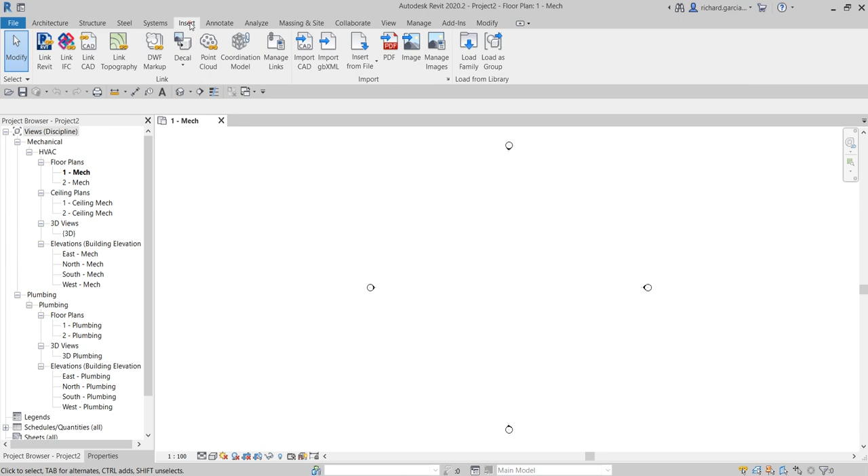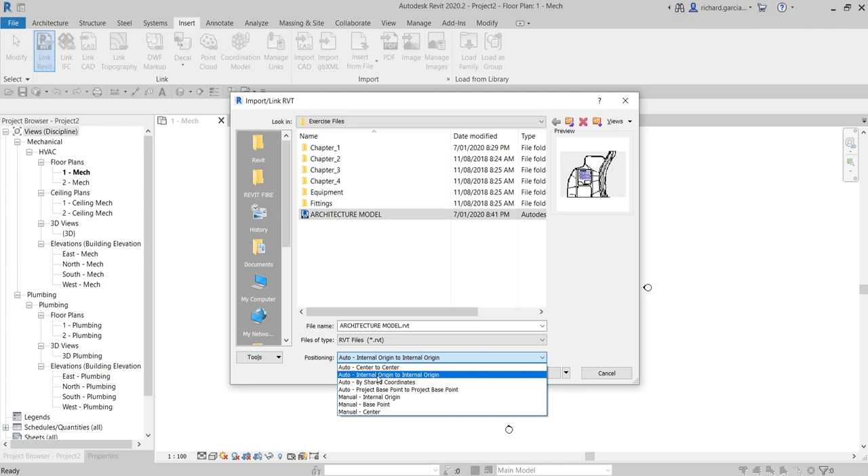I'm going to link that now. So I'm going to select Insert, and then select Link Revit. Just click that one, and let's say this is the architecture model, so I select this one. As you can see, this is the sample project that you can use in Revit. Every time you install your Revit software on your computer, you should have this model already. Alright, I'm going to select that, and use here Auto - Internal Origin to Internal Origin. I'll go ahead and select this one, and then select Open.

Okay, let me just drag this elevation here. So there's an elevation.

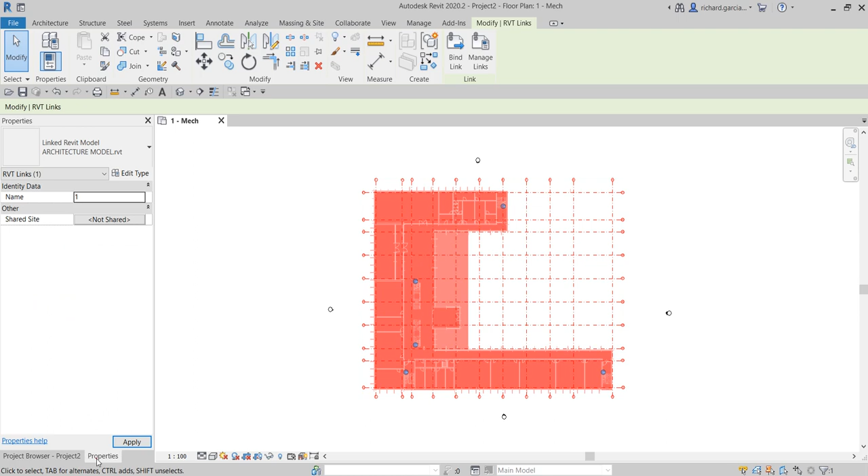Now the next thing that I'm going to do, after we link our architectural model, is select our architectural model. Then go to the Properties, and go to Edit Type to get into the type properties, and make sure the Room Bounding option is checked.

Make sure this one is checked, Room Bounding. You just check that one, and it enables the geometry to define the boundary of a room. The extents of a room are defined by the room bounding elements around the room, so that when you create a space or zone, Revit will detect the room of your linked model. So you'll be able to create your spaces and zones without any problem. This is the standard way - you always do this. You select the link model, go into the type properties, and check the room bounding, just in case you want to create a space or zone in your Revit project.

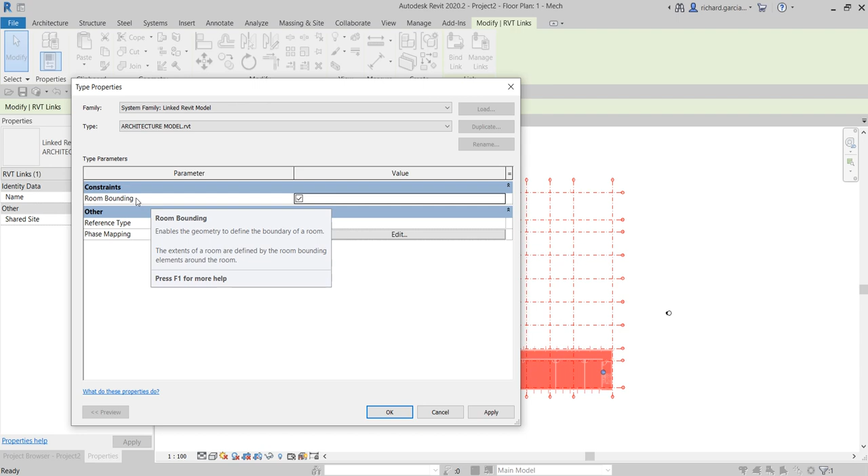Alright, so just check that one, and then select OK. There you go.

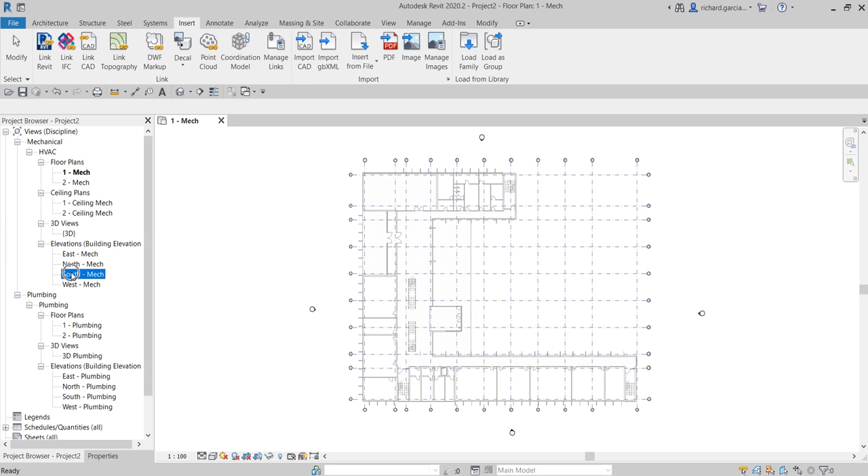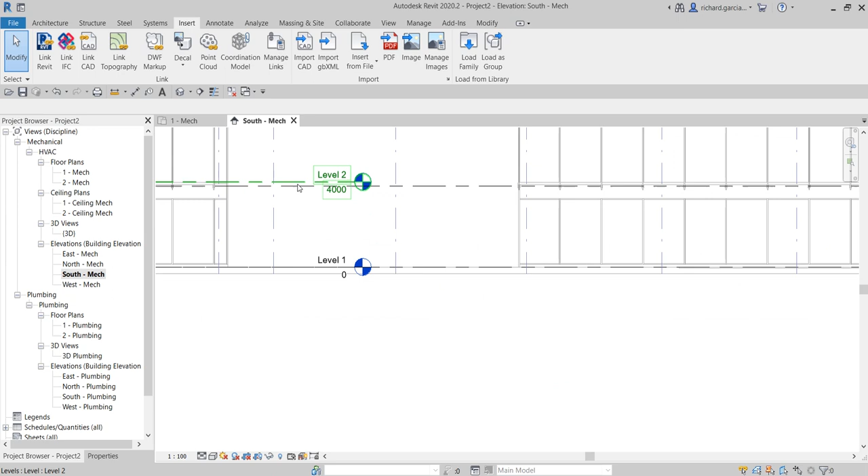Okay, now the next thing you need to do is check the levels of your architectural model. To do that, you just go to the project browser, and double click any elevation here. In my case, I double click South Mech. As you can see, by default I have here two levels - this template contains level 1 and level 2. As you can see, I can select the levels individually. I'm going to click the level, and you see there's a node there, and I'm going to drag that just to make my model tidy. I'm going to put it here, and this checkbox here denotes that your bubble is showing.

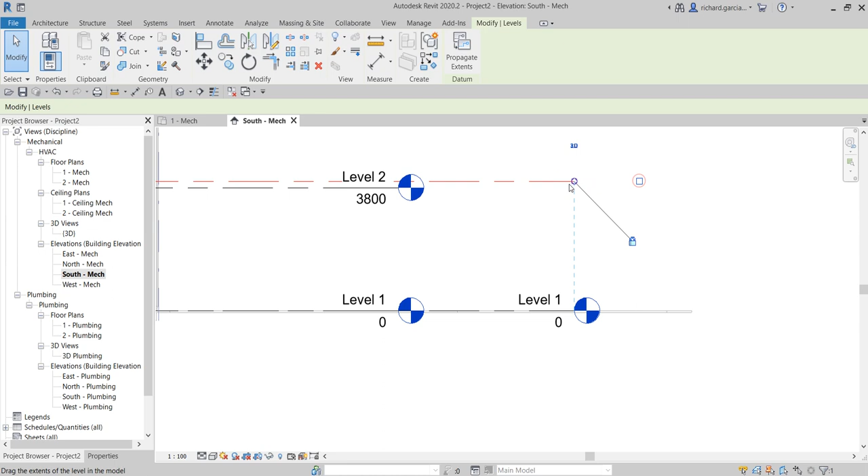If you check that, if this is unchecked, it will hide the bubble, right? You can also do that on the other side. There's also a box if you want to show the bubble there. But in my case, I'm not going to show that, so I just wanted to put it here.

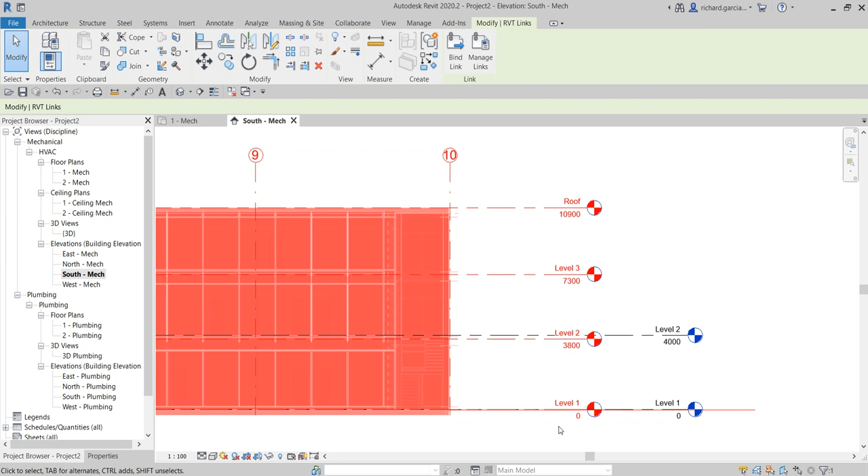As I noticed, the link model here, if I click it, contains 4 levels, right? In my case, my Revit project only has 2 levels. So what I want to do is have these 4 levels as well so that I can coordinate with the Archi model.

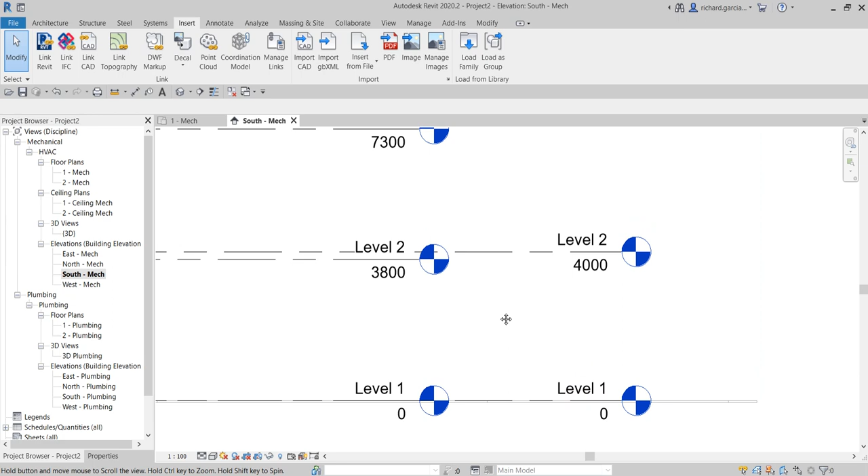Level 1 is already correct, so I have level 1 at 0 elevation. Now for level 2, I just need to follow the architectural model, so I just need to change this to 3800 also.

There you go. Now I need to create a level for level 3 and for the roof as well, for my sprinkler design. So for me to do that, I have several ways to do it.

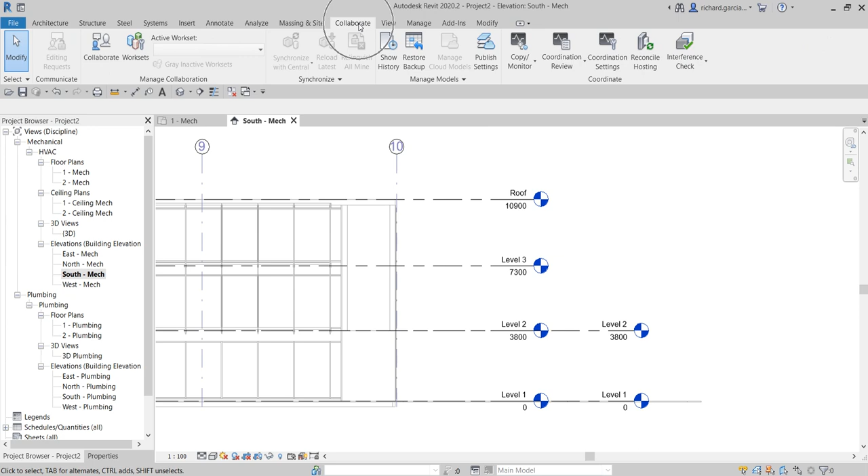I can go to architecture and create a level there, create a couple of levels, or I can simply copy the level here, copy one there, copy one there. Now the third option, which is what I'm going to do, is go to collaborate, and from the coordinate menu there's an option here: copy monitor.

What happens is it monitors and coordinates changes to elements that affect teams from different disciplines. So according to the definition, we use the copy monitor tool to monitor elements between the host project and a link model, or within one project. When one team moves or changes a monitored element—say, our level—other teams are notified so they can adapt their designs or work with team members to resolve the issue. That's how the copy monitor helps in coordination.

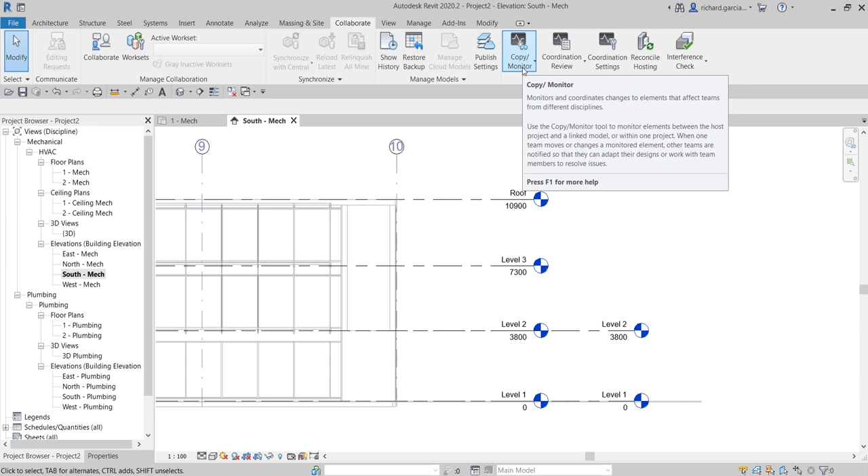Let me monitor this one. Let me show you how to monitor level 1, so that just in case the architectural team moves their level 2, for example, once I reload this link model in my project, I will be notified that there's a movement on level 2. That's how it works when you monitor your level.

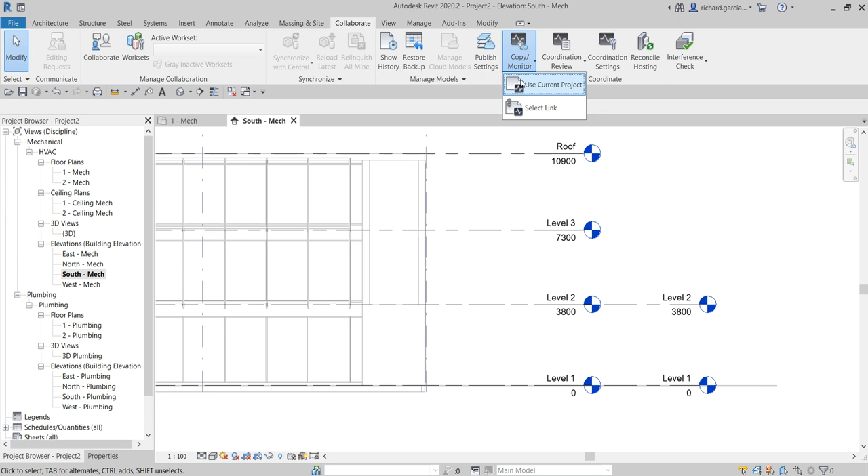All right, so let's copy monitor. I'm going to click that. You select this option, select link, just click that one, and then let's click the link model. Then you will see that you're now on the copy monitor here.

Now I'm going to select the monitor tool. Just click that, and then pick an element to monitor. So I'm going to monitor my level 1, and then the level 1 link, which is this one. Once I click that, you will see this symbol here—that symbol means my level 1s here are being monitored.

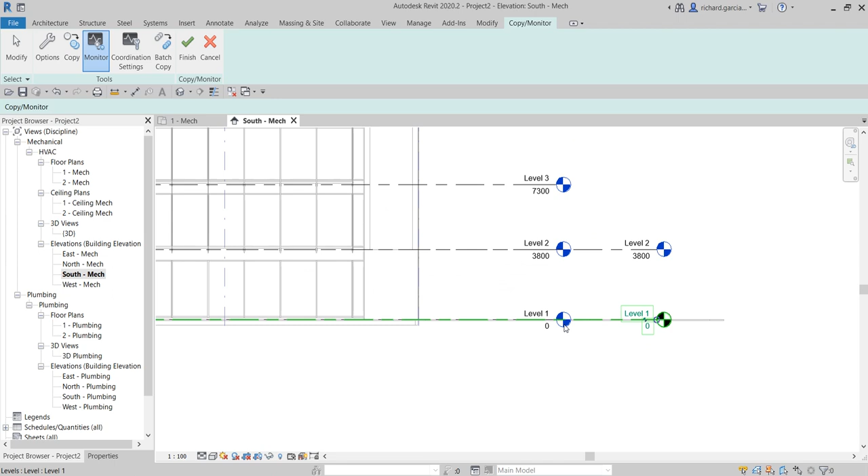That's what I'm going to do also on my level 2 and then my level 2 link model. I click that, click, and again you see that icon, meaning my level 2 is now being monitored. All right, I'm now going to finish this. And there you have it—my level 1 and level 2 are now being monitored.

So just in case there's a change in the architectural model—for example, they changed the height of their level 2, made it, let's say, 4,000—once I reload the latest architectural model, I'll be notified that there's a change on the level. There's a warning that will appear here on the coordination review.

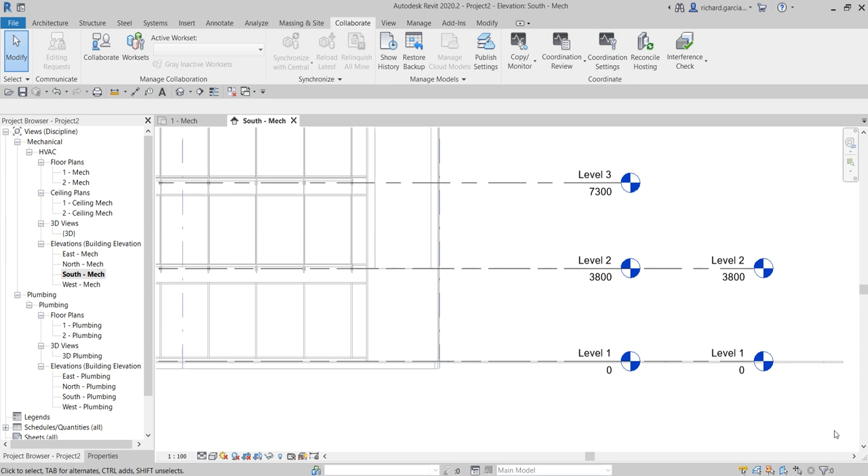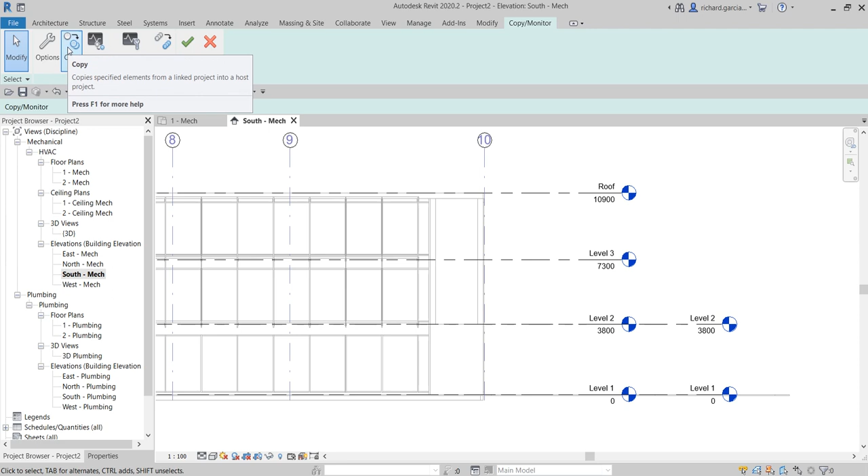Now for level 3 and for the roof, what I'm going to do is select again the copy monitor, select link, select the link model. This time around I'm going to copy the level 3 and the roof, so I'm going to select copy.

Since I have multiple levels to select, instead of doing it one by one, I'm going to check the multiple option here, and then I can use crossing selection like that to select both, and then select finish here.

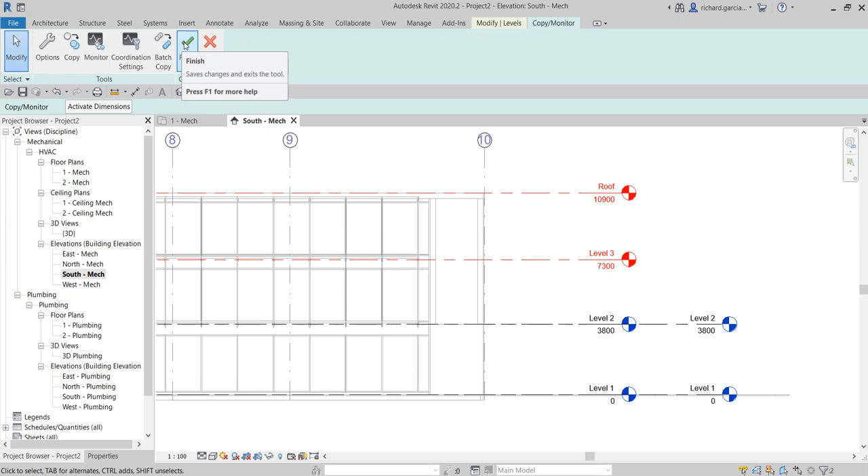Select the finish here first. Do not select the finish here. Select this finish first so that you don't mess up. So once you finish that, you go to the copy monitor again, and then that's the time you can now select finish.

So if I'm going to select level 3, I can now click this, and then I can now drag this. That is now for my MEP project or my sprinkler design project. There you go. So I now have the levels on my link, and also I now have the levels on my project.

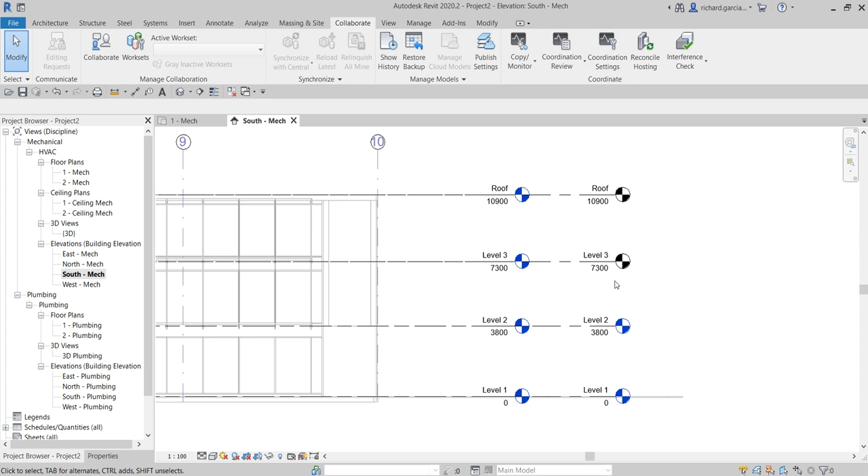Copied and monitor. Now notice that my level 3 here and then the roof is colored black. The reason why it's colored black, not colored blue, is because I don't have the floor plan for my level 3 and then for my roof here. That's the reason why it's black. Because what we just did is we just copied the physical level here for level 3 and then for the roof, but we didn't actually create the floor plan for level 3 and then for the roof. That is why the color is black.

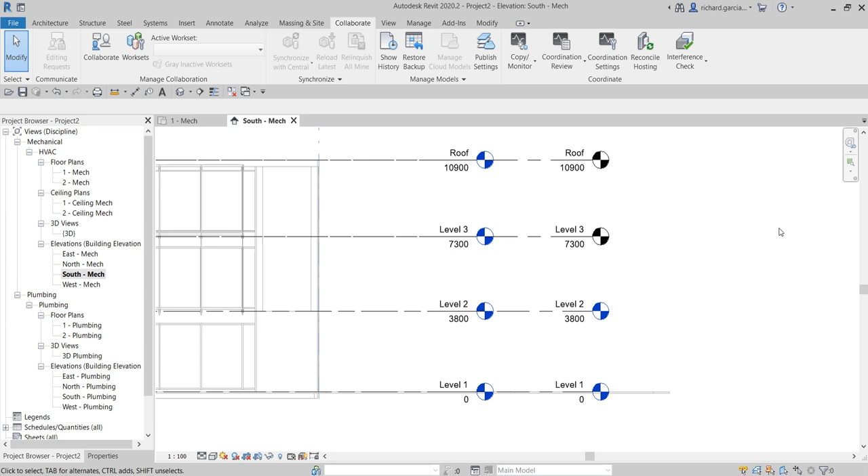Now, for us to address this issue, we are going to create a floor plan for level 3 and then for the roof. To do that, since it has something to do with view, you need to go to the view tab, and then there's plan views here from the create panel. So you can click the drop down arrow, and then you just need to select the floor plan.

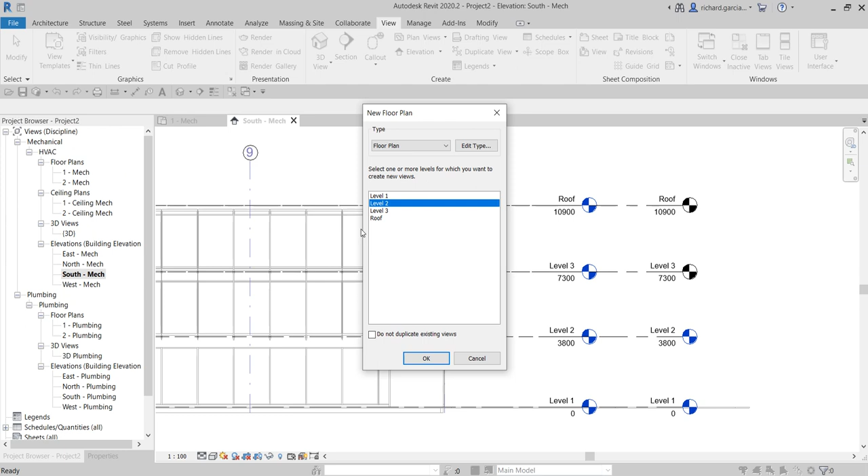Just click that. And then you now see here the two levels, the two plans that you don't have here on the project browser. You also have an option here if you want to duplicate the existing view or if you do not want to duplicate the existing view. If I'm going to uncheck this, meaning I can duplicate the existing view that is level 1 and level 2. But since I already have that floor plan, I am not going to duplicate the existing view. I just want to show here the levels that I do not have on my project browser, or the plan views that I don't have yet in my project browser.

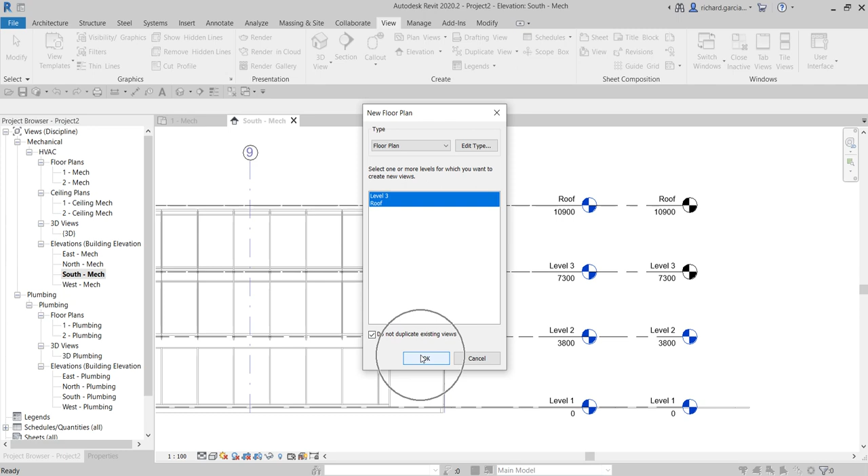So I'm going to select both. I'm going to hold control to select the roof, and then I select here OK. There you go. So I now have here level 3 and then the roof.

Now I'm going to change this. So instead of 1-Mech, I'm going to rename this. I click, right click and rename. So I'll just call this 1-Sprinkler, or fire protection, or FP, or whatever name that you want or whatever standard that you have in your company in naming your sprinkler view. Let's say I'll just call it 1-Sprinkler.

Same with my Mech here. To rename, you can either click, right click and rename, or just double click and then click again, then click again, and you'll be able to rename that. So this is sprinkler. Oops.

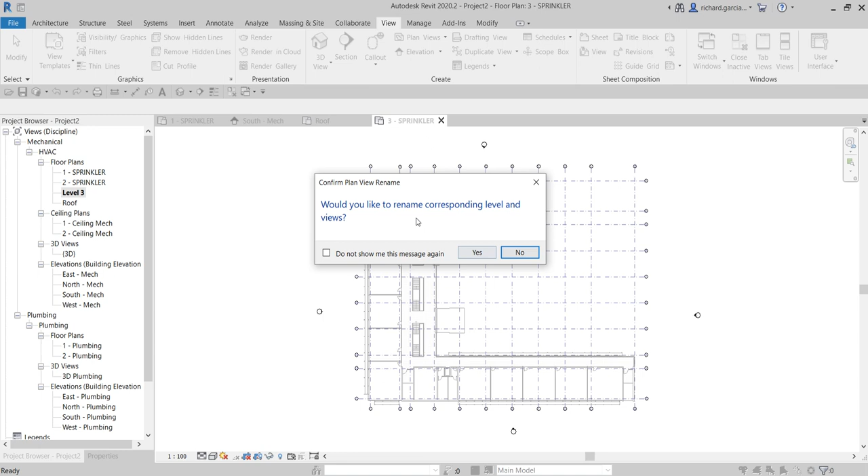Would you like to rename corresponding level and views? I'm going to not show this message, so I'm not going to change it. I'll just select no to just click. Okay, sprinkler. There you go.

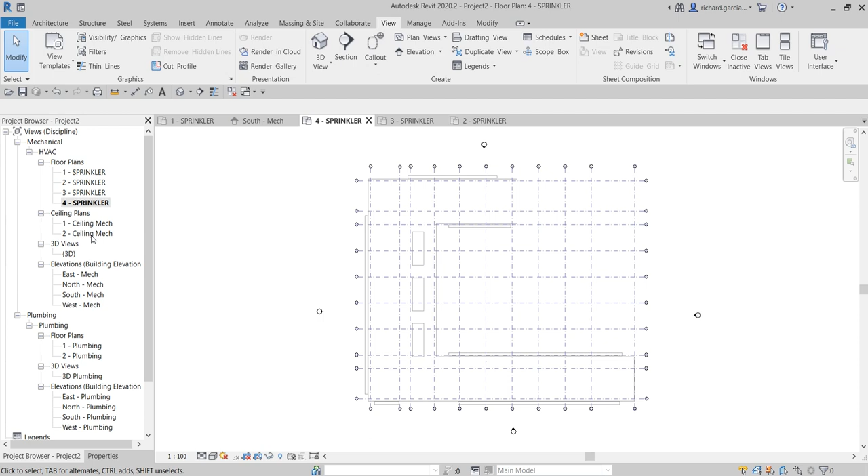So I have now level 1 sprinkler, level 3, level 4. Now I also want to create my coordination view, the ceiling plan view for my third floor. I'm not going to create a ceiling plan for the roof. I just want to create ceiling plan up to third level, not on the roof.

To create the ceiling plan view, the third one, by the way, let me just quickly rename this one. So this is the ceiling for my sprinkler, the ceiling for my sprinkler.

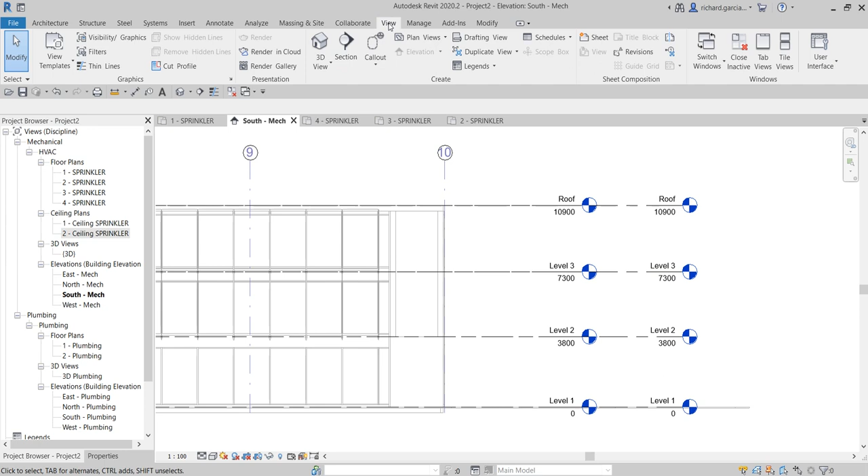Alright, so to create the ceiling plan for the third level, just need to go to the view, plan views, reflected ceiling plan. Just click that. So I'll just select level 3 there, and then I just select here OK. There you go. So it's now inserted here on my coordination. If I'm going to dig into this one, I click that, there's a question mark there, so there's the ceiling plan.

There you go, so this is what I'm looking for. I can also click the view once and then press F2 to rename it. So to rename, just click the view and then press F2. So this is for my ceiling sprinkler.

Now, what I want to do here is I do not want to place all my floor plans, the sprinkler plan and the ceiling sprinkler, under the HVAC discipline because I'm doing a sprinkler design. So I do not want the sub-discipline to be HVAC. That's why I'm going to click all of these views by holding shift, click level 1, hold shift, then click number 4, the sprinkler, and then go to properties to change the sub-discipline.

Oh, it doesn't allow me to change it multiple times, so I guess I just need to change it one by one. So I click this, go to the properties, and change the sub-discipline. Instead of HVAC, I will just type sprinkler. Okay, and enter. There you go. So as you can see, it's now here on my sprinkler sub-discipline.

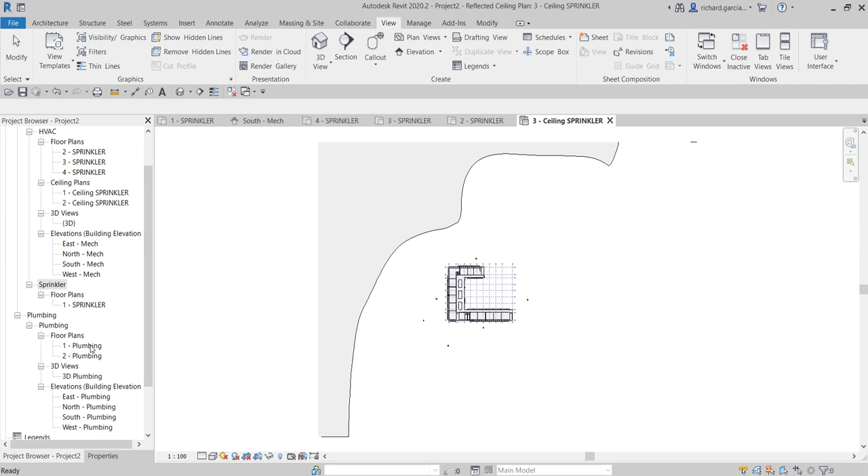Or let's say, for example, I do not want sprinkler, I want fire protection instead. Okay, and then enter. There you go. So I click this, go to properties, and instead of sprinklers, I look for fire protection. Apply. And there you go, so I now have fire protection as the sub-discipline.

So for these views, hopefully I can change it multiple at once. It doesn't allow me, okay, so I'll just change it one by one. I click, put it in the properties here, and change the sub-discipline, and then look for fire protection. There you go.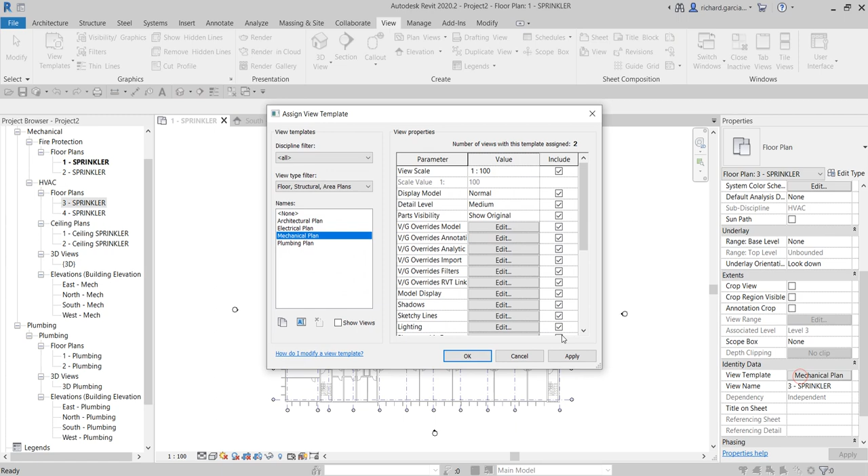Now for this one, if I click this, notice that I can't change the sub-discipline. Why? Because currently, if I move the slider down, there is a view template applied here on my 3 sprinkler view. The view template applied is mechanical plan. So what I want to do is remove the mechanical plan view template first. I click that and select none. This is probably the reason why it is not allowing me to change the sub-discipline in multiple selection, so I remove it and select none. There you go, later on I'm going to show you how to use the view template.

Now I'm going to select level 3 and then hold control to select level 4. Hopefully I can now change it. Yes, so I can now change it. I select fire protection and there you go.

Okay, same here with my ceiling sprinkler. So I have sprinklers here. I click this, click level 2, and then change the sub-discipline. Instead of HVAC, I'll make it fire protection. There you go, same with this one.

Alright, so I click that, the sub-discipline is already fire protection. Now the discipline here is coordination, so I want to put that under mechanical. I select this view and this time change the discipline instead of sub-discipline. I click the dropdown and look for mechanical, and there you go. So I now have set up my level 1 to 4 floor plans and my ceiling plans, my coordination views 1, 2, 3, under the mechanical discipline and the fire protection sub-discipline.

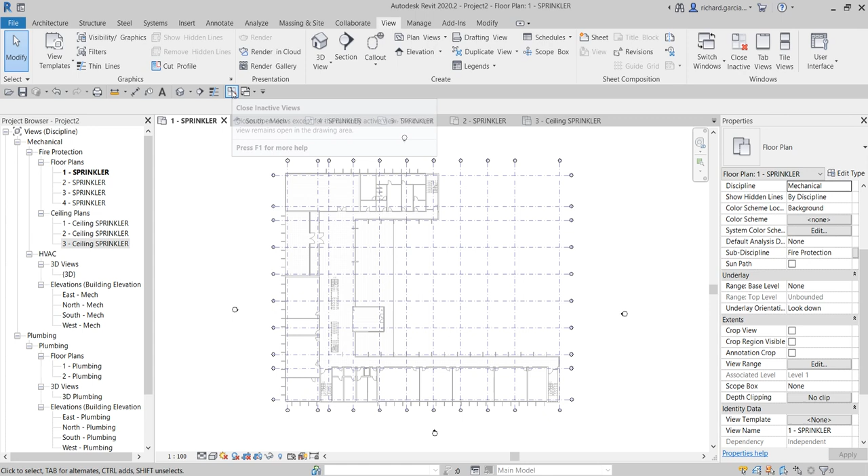Now what I'm going to do is copy first the grids here. I want to copy the grids because currently these grids are from the link model. So for me to be able to copy the grids, I can just use copy monitor for this one. To do that, let's go to Collaborate, Copy Monitor, Select Link. Let's select the link model and then let's copy monitor.

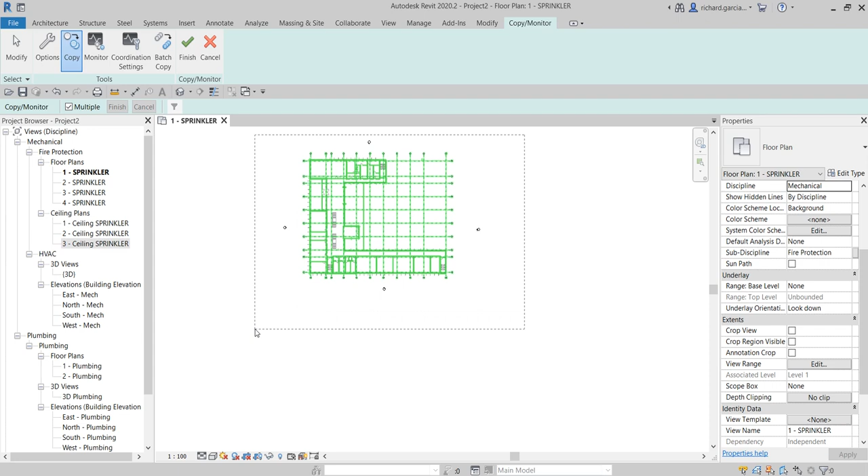Copy and then make sure you check the multiple, since we have multiple elements that we'll be selecting. I'll be doing it like this. And then we are going to filter this. Where's the filter? There's the filter selection. I just want to select the grids, so I'm going to uncheck the rest, and select here, OK.

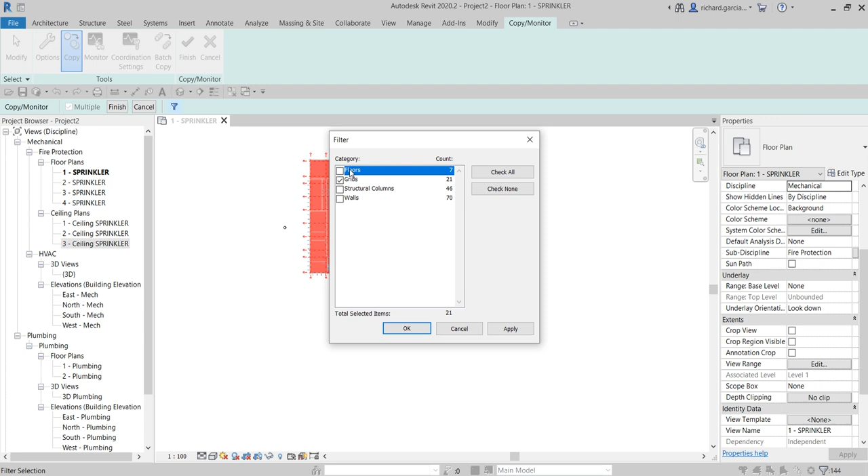It will also tell you what are the elements that you can copy monitor. So does that mean you can copy monitor the walls, structural columns, and the floors? I think so, yeah, but we only need to copy the grids. So I select the grids and then select OK. There you go, so only the grids are selected.

So I'm now going to finish it, and then go to the copy monitor and finish it.

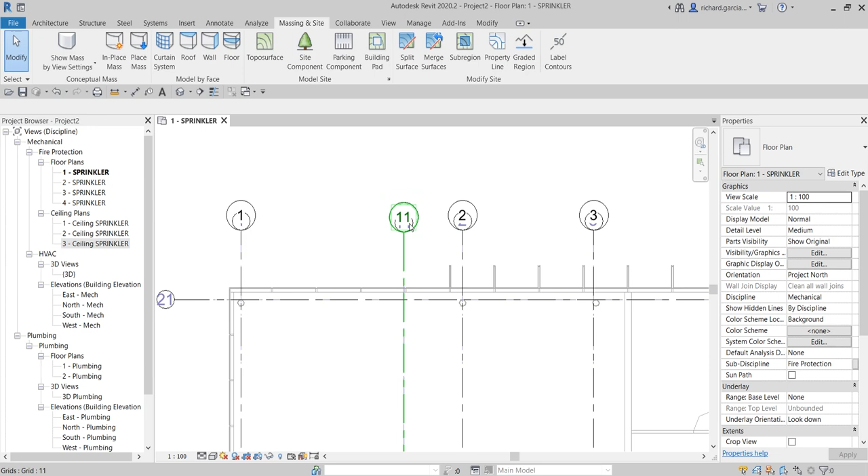So I now have here the grids of my Revit MEP project for my sprinkler design. That's why what I'm going to do is type VV, the visibility graphic overrides, VV, Victor Victor, or I can just click edit here.

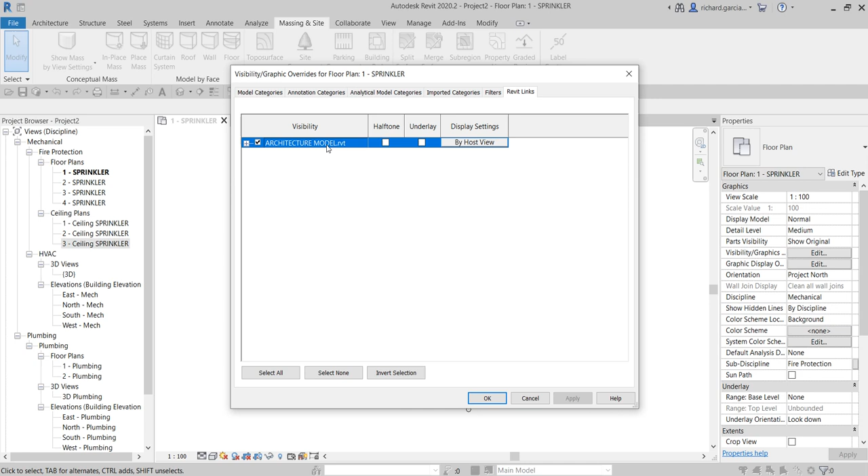And then I go to the Revit links. This is the link model. So let's go to the by host view and then customize it. The reason why I want to customize that is I want to manually turn off the grids of my link model. So I need to make it custom.

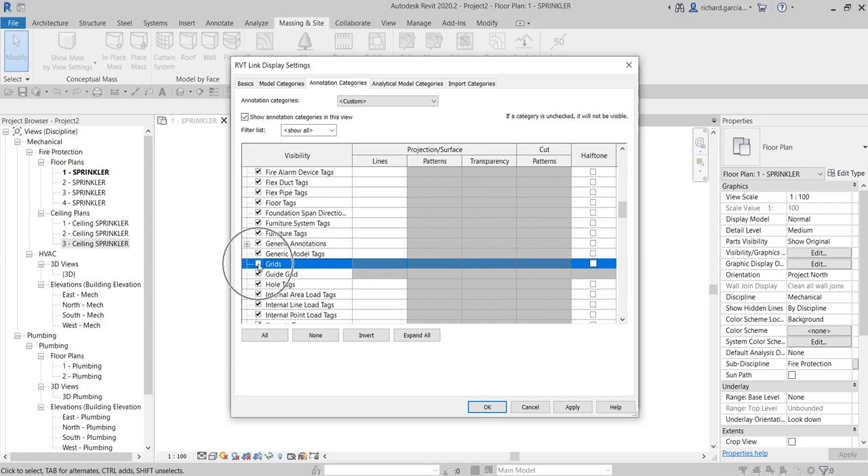So you go to the annotation categories, make it custom, and then look for the grids. Let's uncheck that grids. Select OK. Select OK. And there you go, so all the grids of my link model are now turned off.

So all of these lines that you are now seeing here is the grids of our, I mean, our MEP model. Okay, too bad, we need to rename all of this.

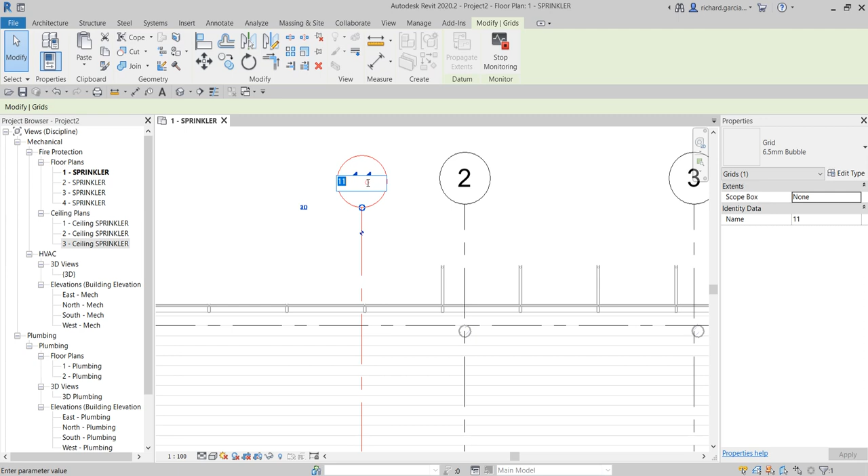Because there are some designers or some standards that want, let's say, all of this to be letter A, to be alphabetically ordered, and this one to be numerically ordered, or vice versa. Now for this one, instead of 11, why not I just make it 1A.

So it's being monitored, that's why you see that dialog box. If you have time, you can change this to, let's say, alphabetically ordered: A, B, C, D, such thing as that.

Now the next thing that we're going to do for our level 1 sprinkler view, we are going to set up our visibility graphic override. So let's go back again to our visibility graphic overrides.

So for this view, since we are talking about sprinkler, definitely I do not want to see here the air terminals. I do not want to see any duct, ducts, fittings, linings, accessories, anything that has something to do with duct. Same with the electrical, I do not want to see that. Entourage, maybe I'll just leave the entourage here, you know, the cars, the people. I do not want to show the flex duct, but I want to show here the pipes.

HVAC zone, I don't want to show that. Furniture, I don't want to show that one. So it's up to you, it's up to your company standard, guys. You just need to turn off those things that you do not want to see on your sprinkler design. So I'll just leave the mechanical equipment turned on here. I do not want to see any of this fabrication. I want to see all the pipes.

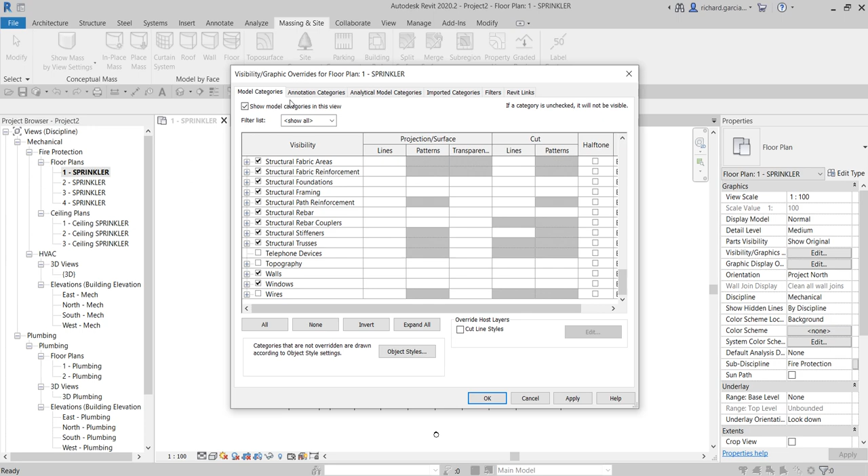So I'll set up also my ceiling plan here. I'm going to double click this and then open up the visibility graphic overrides. Again, same things: I don't want to see the air terminals, anything that has something to do with duct. What else? Flex duct, I don't want to see that. Any furniture, I don't want to see that. HVAC zone. Mechanical equipment, I want to see that. Pipes.

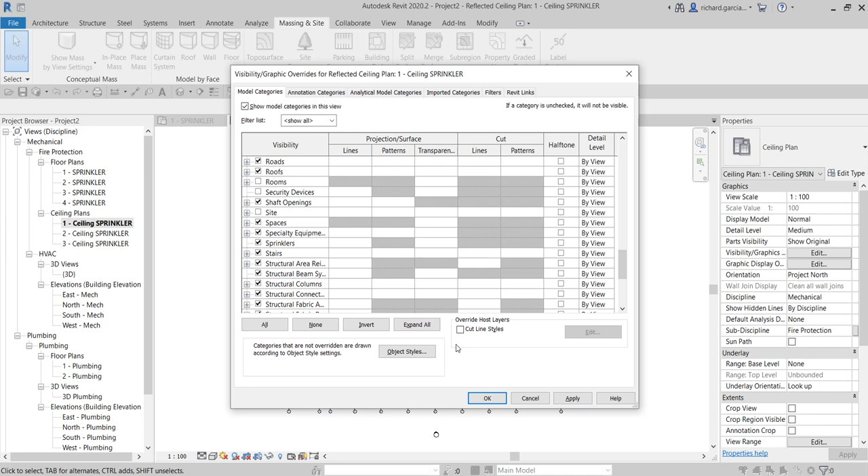Okay, so for example, these are the elements that I want to see. I'll just select OK. Right, so now that I have set up the views that I want to see, or the elements that I want to see in my views, the next thing that I'm going to do, by the way, on my sprinkler, I want to hide the visibility graphic overrides.

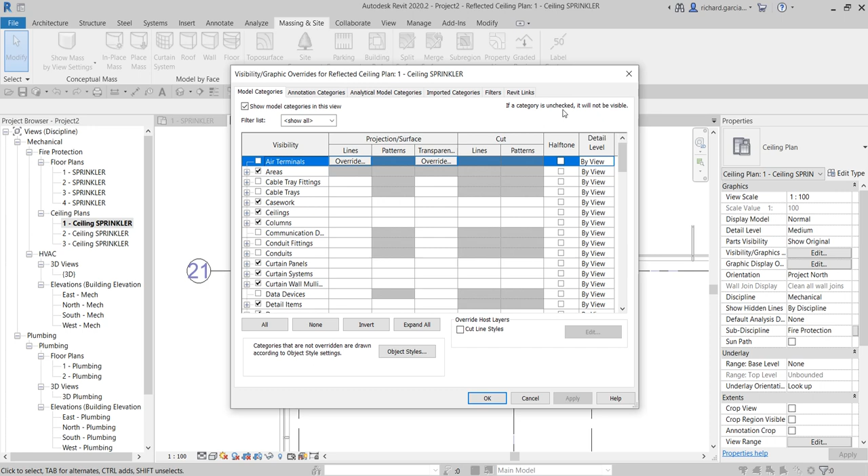I want to modify the visibility graphic overrides for this ceiling plan. I want to hide the grids here. Okay, so custom grids.

There you go. Okay, so now what we want to do after we set up our view is, we are going to create a view template. The reason why we're creating our view template is that we do not want to redo all the things that we have done on level 1 to our level 2, level 3, and level 4, as well as to our level 2 ceiling and level 3 ceiling.

So we do not want to redo all the things that we have done on our level 1 sprinkler and level 1 ceiling. So we are going to set up the view template, using these settings that we have here. To do that, I'm going to right click the one dash sprinkler because this is the typical settings that I want. There's an option here, create view template from view. So we're going to use this view to create our view template. I'll select that, and then let me call this sprinkler view. I'll just select here OK, and then it will open the view templates.

You can see that if I go to the visibility graphic overrides of my sprinkler view, if I select here edit, notice that the air terminals, the ducts are already turned off in this template, right? So I'll just click here OK.

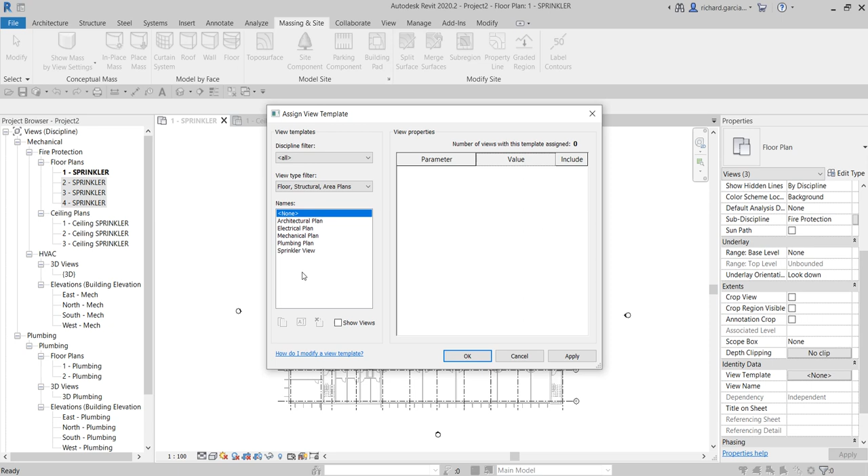Probably let me just change the name of this. I'll just change the view. Okay, so I select this, and then I just select here OK. There you go. So if I double click the level 2 sprinkler...

Notice that the view template is now sprinkler plan view. Level 3 is sprinkler plan view. Level 4 is sprinkler plan view template, right? And if I click the level 1 sprinkler here, notice that there is no view template that is applied here. So all I have to do is to select none and then apply the sprinkler plan view.

There you go. So for this one, right after you apply the view template in your particular view, you see there's the view template already. You cannot just simply change, let's say for example, the scale of your view here on your view control bar. If you click that, notice that they are now disabled. If I want to change the detail level, it is disabled, I can't change. If I change the visual style, I can't change. Why? Because there is a view template that is controlling this view.

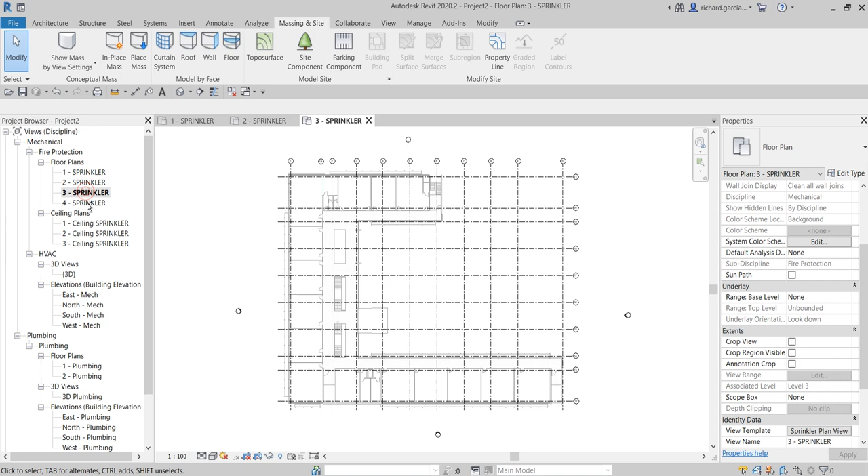Same with level 2, level 3, and level 4. You cannot just simply go to your view control bar and change the scale, change the detail level, change the visual style here. Why? Because there's a view template, so they are being controlled by the view template.

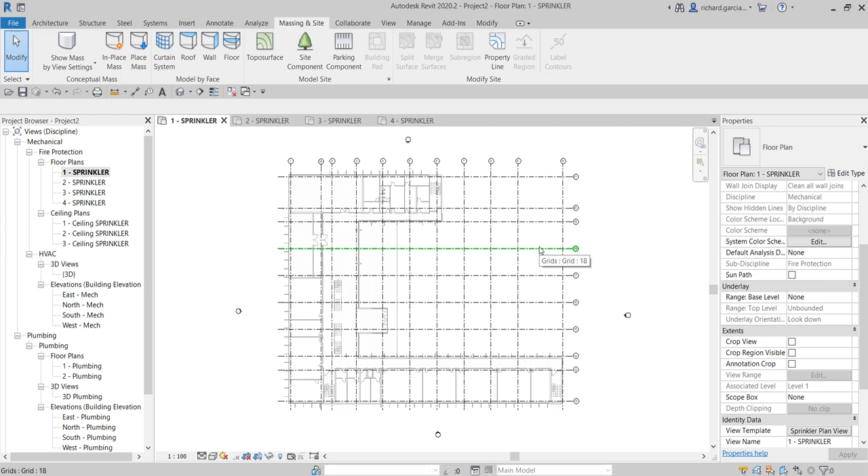So if you really want to change the scale of this one, let's say for example, you want to change that to 1 is to 50, what you need to do is you go to the view template. This is the view template now, and then here you can change. But take note that this view template is currently assigned to 4 views, which is level 1, level 2, level 3, and level 4.

So if you change this to 1 is to 50, not only your 1 dash sprinkler will change to 1 is to 50, but all of the other 3 views will also update to 1 is to 50. So just be aware of that, okay? Because they are being controlled by one view template. So any changes that you made here, not only the scale, but any of the settings that you change on your view template, it will affect the other views as well. Okay, so just remember that one.

Another thing, if you want to create a separate sprinkler plan view, let's say you want this one to be 1:50, but you do not want your 2, 3, 4 views to become 1:50. You want them to remain 1:100. That means you need to create another view template.

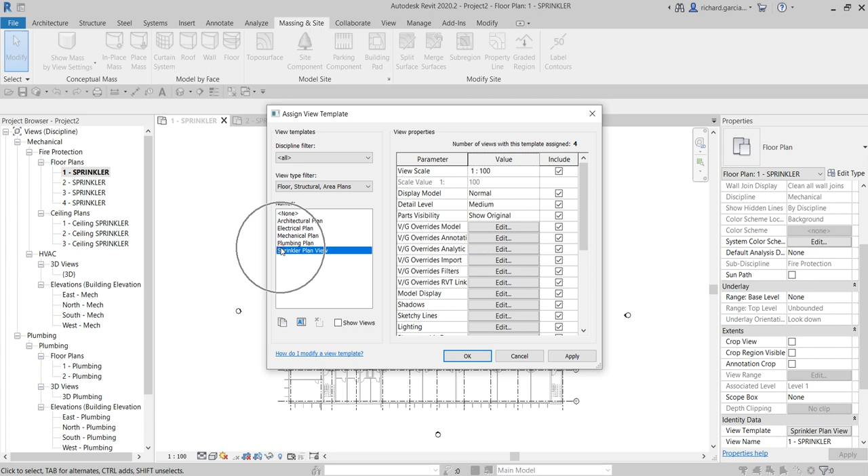To do that, you need to duplicate this. Just select this, duplicate, and then rename. So this is your sprinkler plan view underscore, probably you can call it 1 underscore 50, something like that. And then maybe this one you can just rename.

Underscore 1 underscore 100, something like that. So this is 1:100, and this one is 1:50. So that you have two separate views. I just select here, OK. So there you go, it's now updated to 1:50.

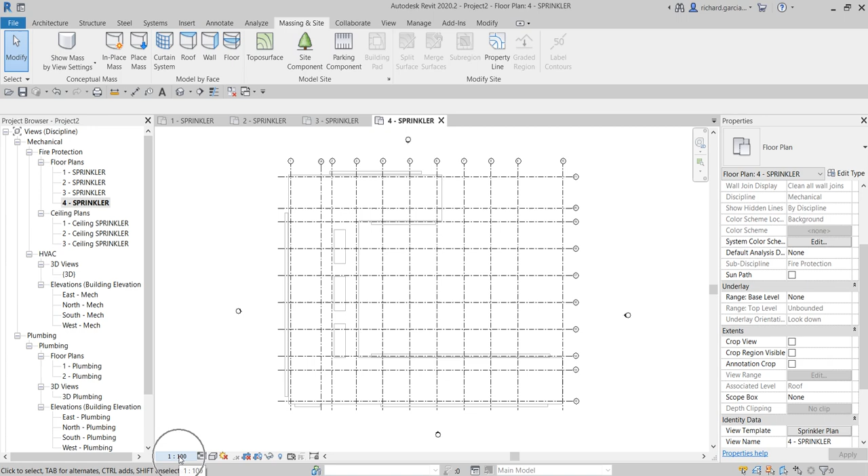If I double click this, so this is still 1:100. This is still 1:100. So this is still 1:100. So this one is 1:50, it is being controlled by the sprinkler plan view 1:50 template. That's how the view template works.

So let's do it also on our ceiling plan. This is our model view, right? So this is our model view. We want that setting to be applied here as well on our 2 and 3 ceiling sprinkler. So let's set up our ceiling plan view here.

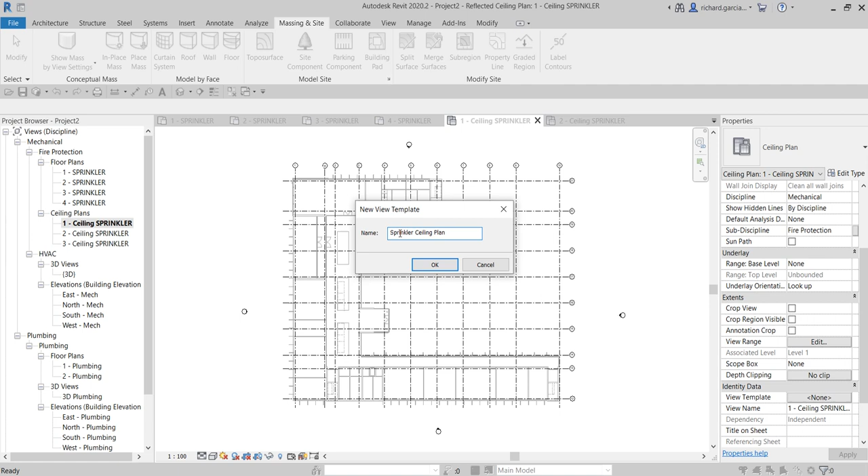Let's right click that, create view template from view, and you can call this sprinkler ceiling plan. Just ceiling plan, all right. Just select here, OK, there you go. I'll just select here.

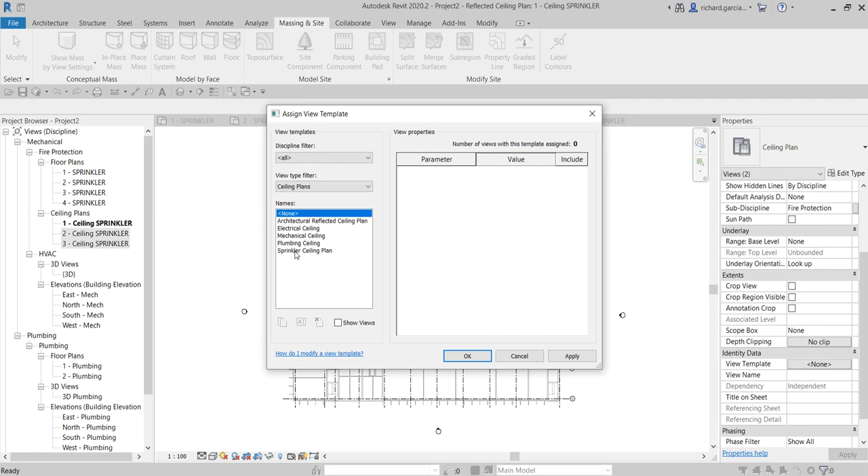Now let's apply that to our 2 and 3. Apply the view template, apply the sprinkler ceiling plan, and then select OK. There you go. If I double click this, as you can see, it's now set up, so all the link grids are now hidden in this view.

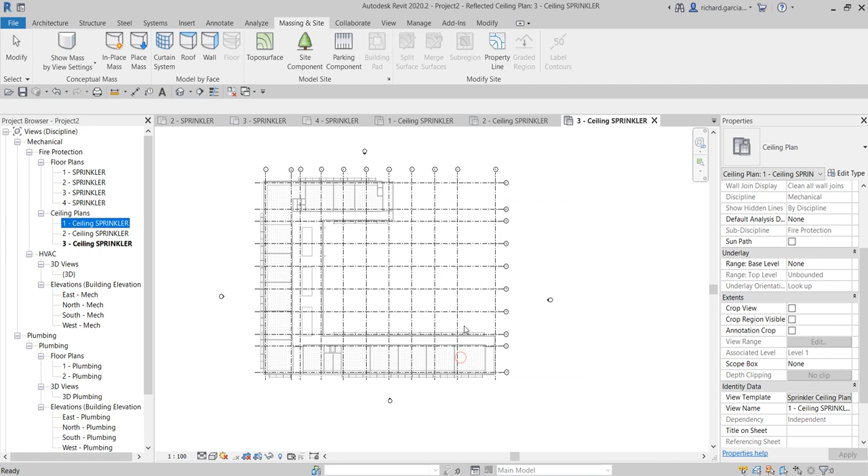Again, these 3 views - let me click this and then apply also the template for that. So these 3 views are now being controlled by the sprinkler ceiling plan view template. You see, it is assigned to our 3 plan views or 3 ceiling plan views. Again, any changes that you make here will not only affect this one, but it will affect the other views wherein this template is being applied.

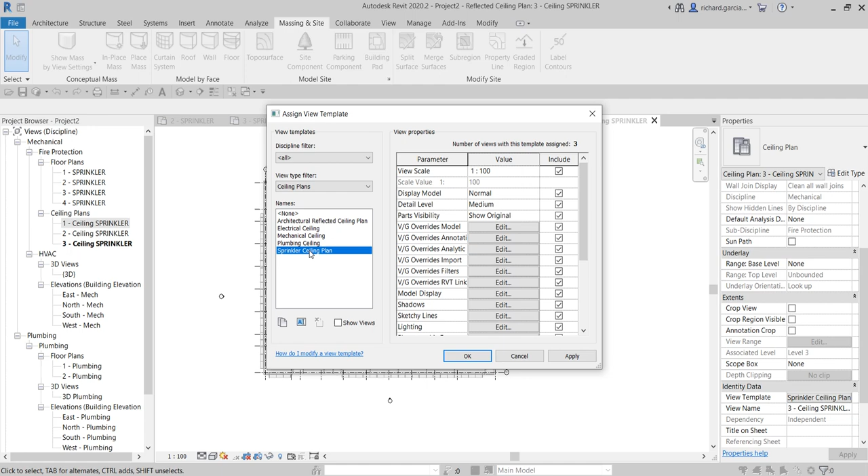So basically there you have it. That's how you set up your project. Let's say, for example, you are designing your sprinkler design, that's how you set up your project, that's how you link, that's how you copy and monitor the levels. We also did creating some plan views, and then we created sprinkler and coordination views, and then after that we created view templates.

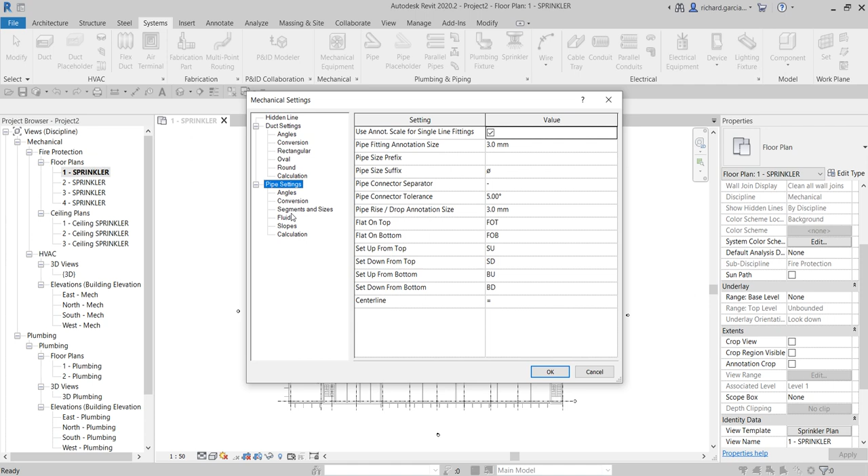Another thing that you can consider when setting up your project is you can go to the mechanical settings by going to systems, and then you go to the mechanical settings here. You can click that, and then you can go to the pipe settings. Here you can modify these standards, these settings currently. You can specify the sizes, for example, for copper, you can specify the sizes.

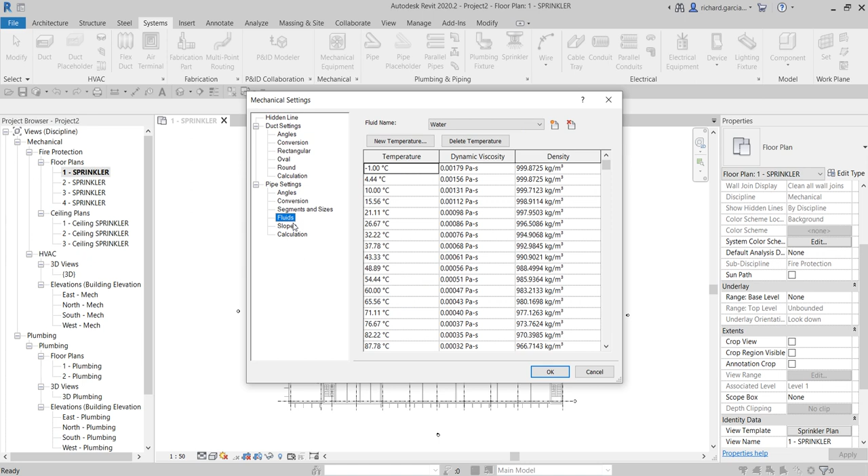So you have heaps of type of segment here that you can use, and if you want, you can also create a new pipe segment here. You can also specify the fluids, slopes. The calculation is here for your reference. You can also include your mechanical settings when working on the project setup of your sprinkler design.